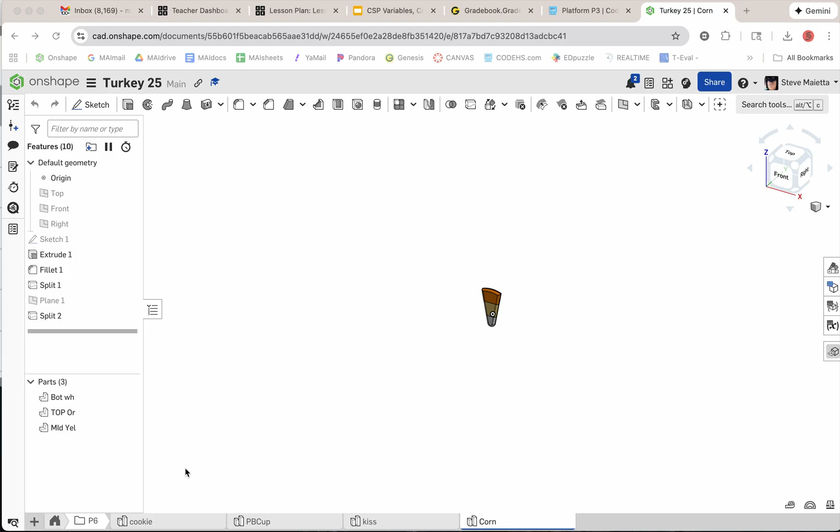I didn't make the pattern yet, but that's okay. I'm going to start my assembly first, and I can do that part later. I'll just show you the basics of how to assemble, and I'll put the two parts together for you here.

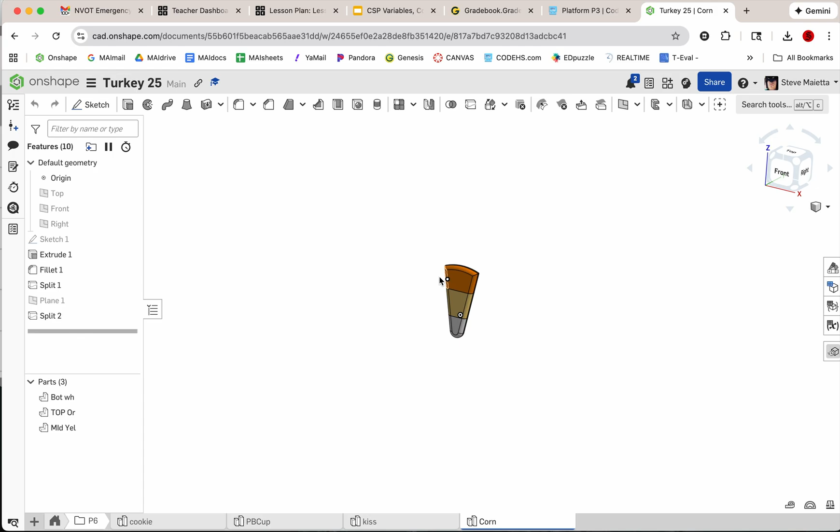First, look for a tab that says assembly. I don't have one because I made a bunch of folders, so all I do is click plus, create an assembly tab. There it is, it's empty.

This is where I like to say, this is where we build our Legos. These parts are our Legos, right? So we made our Legos already. First thing we're going to do is press insert, and we're going to bring our parts in.

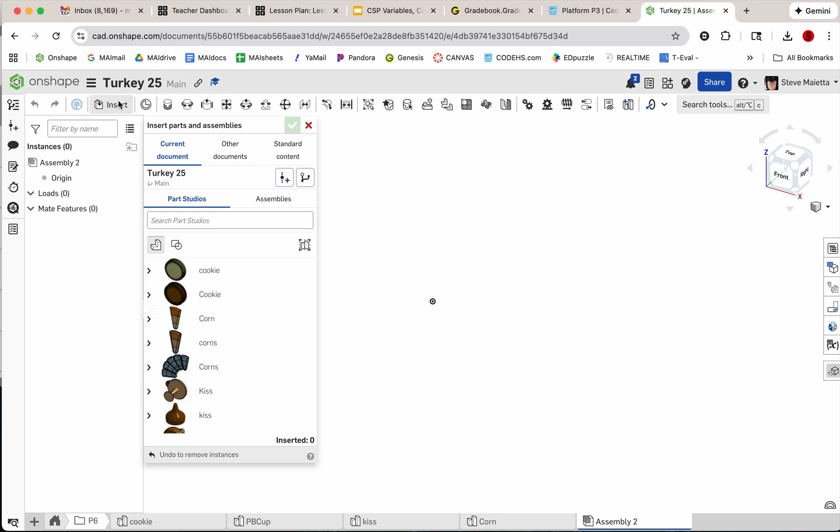Let's bring the cookie in, click it and stick it. The cookie is the center of our project, so I like to put that near the origin point, drop it in place. Let's bring the Chocolate Kiss in, drop it over here, and we'll find the peanut butter cup and drop that over there. These are the ones I'm going to assemble for you guys today.

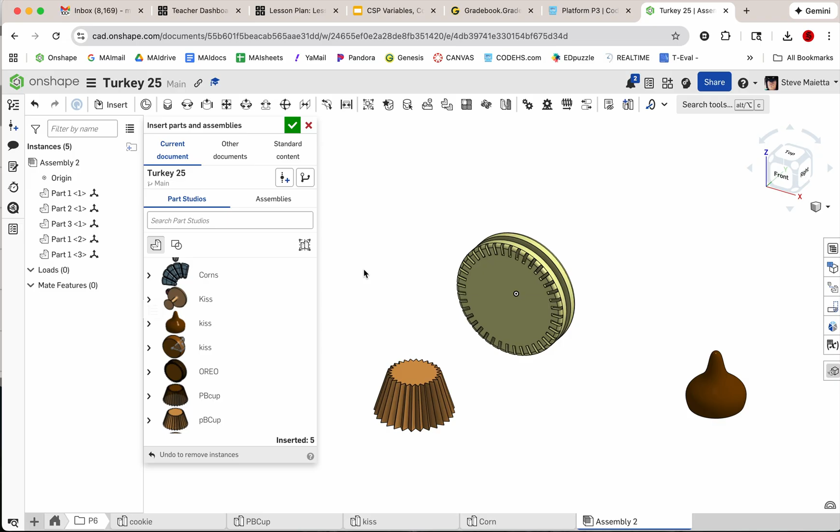Notice we have our parts all in one space. Over here we have 1, 2, 3 parts for our cookie, and we have these other 2 parts in our tree over here. First thing I want to do is make sure our cookie is all built in the right spot.

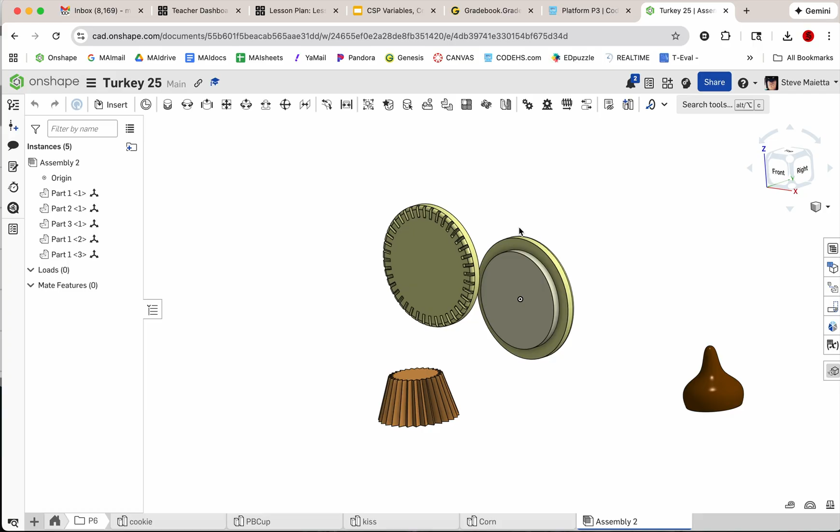I don't want to be able to pull it apart like that, so I'm going to group it together so it acts as one. I'll just drag a box around it carefully, and up here is the group command. Now I have a group, and I'll just name it cookie. There's my cookie, now it's all locked as one.

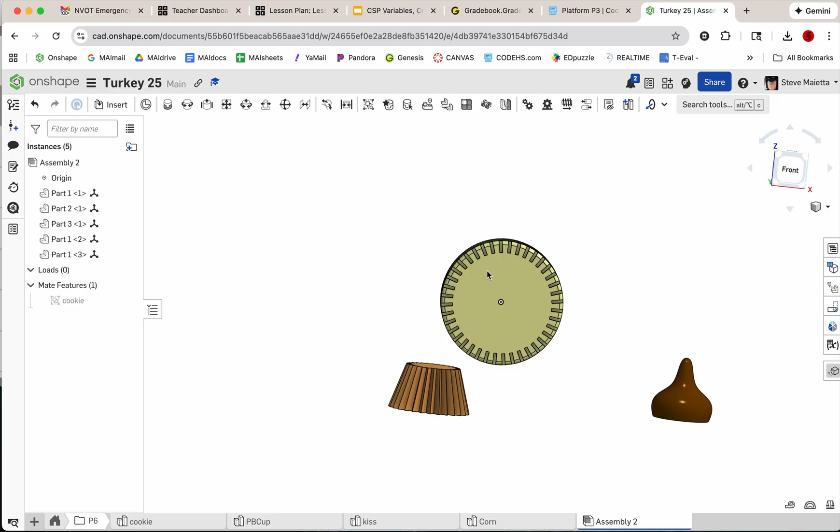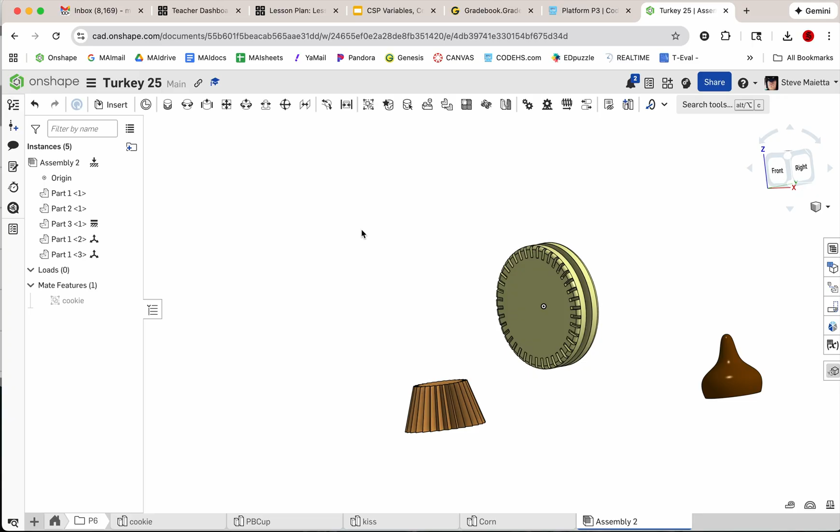I'm going to put it back in the center. Since the cookie is the foundation for our project, let's fasten it in place. I'll two-finger click on our cookie and use this thing called fix. That locks it in place—you see we have a fix now, and I can't move that. That becomes our foundation. It's a good concept, especially when you get into more complicated projects with moving parts.

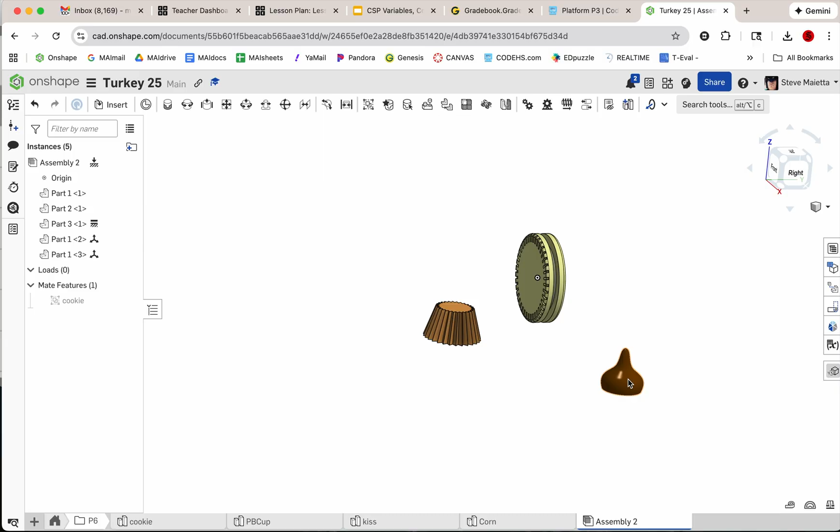Next, let's put this Hershey Kiss up here, because that's where the nose of the turkey is. Notice the kiss is in the wrong orientation, so if you click on the part once, you will see a set of handles appear.

These handles have curved outer handles that allow you to rotate a part. The straight arrows let you move it in a certain direction, and the curved ones let you rotate in the required direction. These rotate on the 3 XYZ axes—this one happens to be rotating along the X axis.

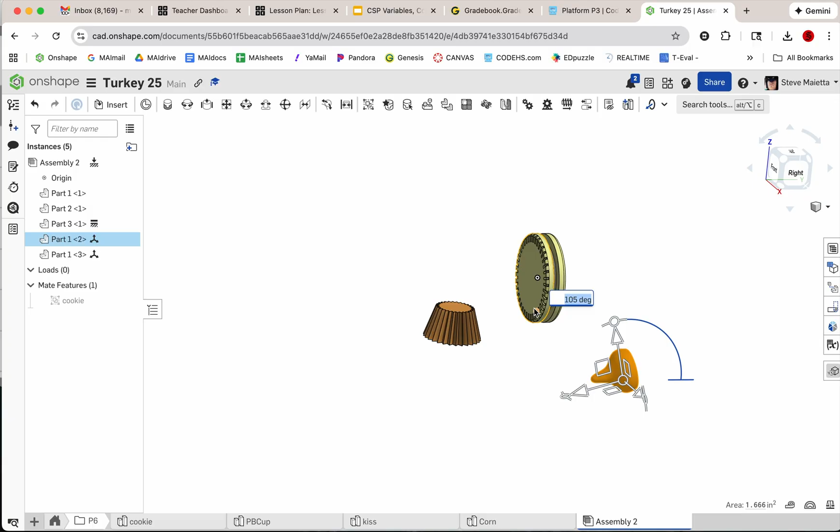Here's an important tip: always land your rotation on 90. Type it in, 90 or 180—it's less common to need some random angle. Once you get it at a random angle, it doesn't mate as cleanly, and it's hard to get it back. So my tip is always do it in increments of 90, unless you know it needs to be something else. I'll just press enter—now the kiss is in the right orientation.

I'm going to get it somewhat close to where it needs to be, and now I'm going to fasten them together.

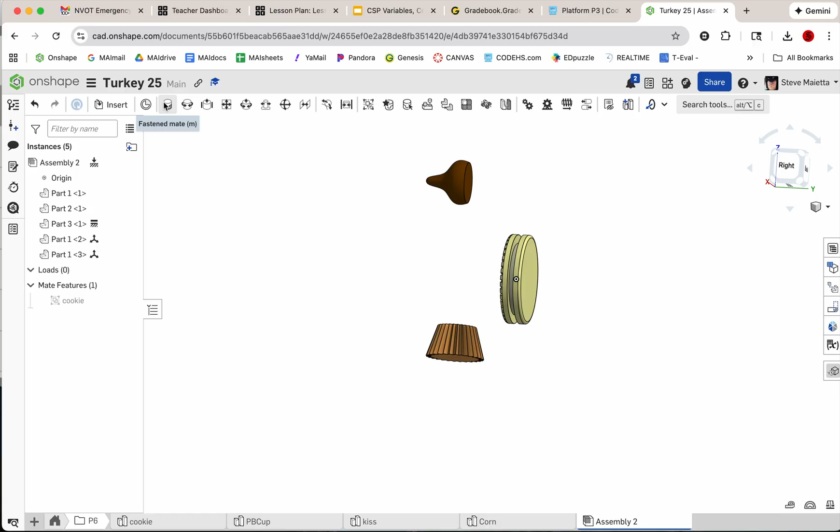Okay, so what we do is we're going to fasten them, which is right up here. When you click Fasten Mate, it's asking you for these things known as mate connectors. As I start to hover around here, you will see these little orange or yellow circles appear. Those are known as mate connectors. So I need to put the two mate connectors, one from each part.

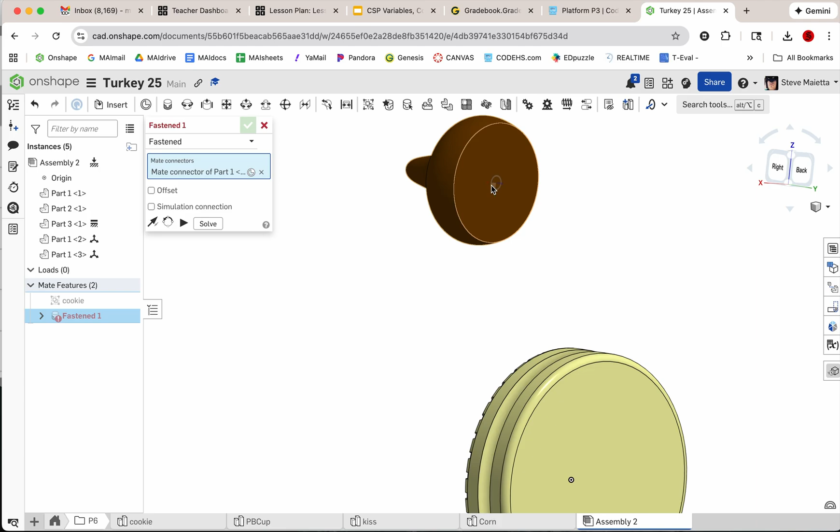So this one in the center, I'm going to orbit around, and I'm going to find one in the center of this part as well. And notice it's going to bring the kiss. It makes those mate connectors exactly match.

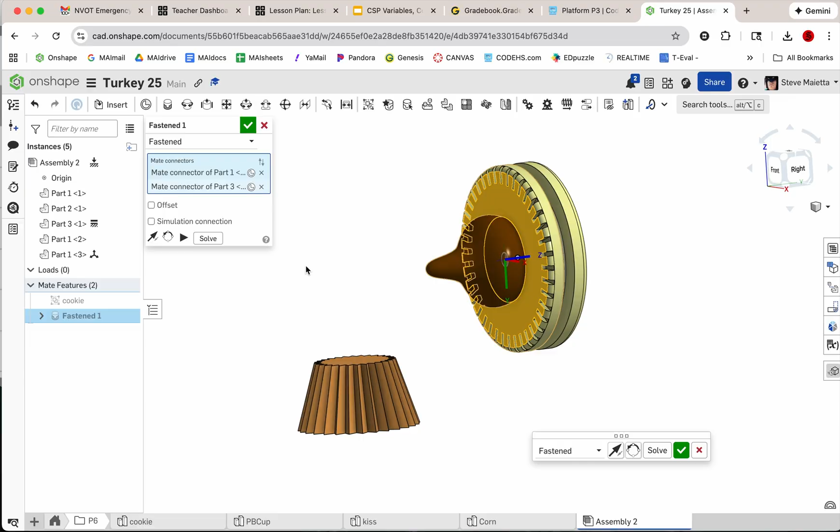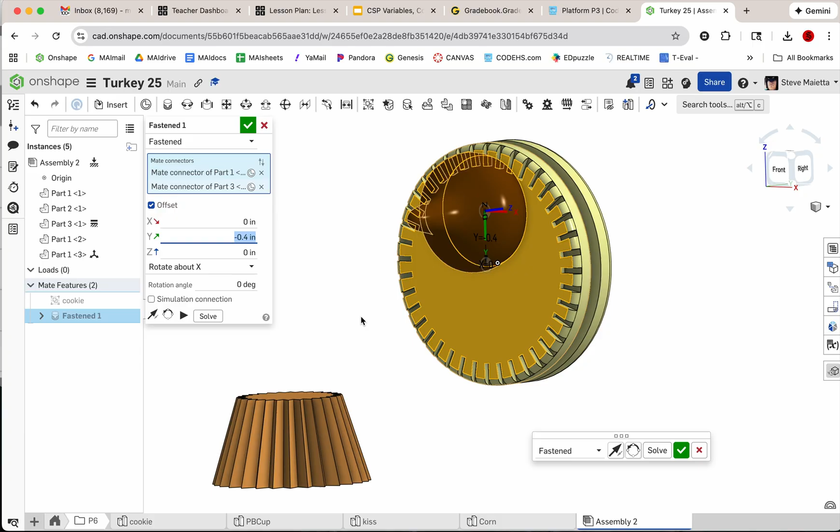Okay, and that's cool. Now we need to move the Hershey Kiss upwards, right? Because it's supposed to live up here. This is the face of the turkey. So if you look up here, we would want to move it along the Y axis here, green. Okay, so I'm going to click offset, and I'm going to find the green one here, and I'm just going to use the arrow keys on my keyboard, up or down arrow, to add some distance between those.

Okay, and there's no true dimension on the blueprint for this, so do it by what you think looks right. And to me, that looks good. I happen to move it negative 0.4, and then I can accept that. Now I've fastened that, and you notice you can't move it, I can't drag it.

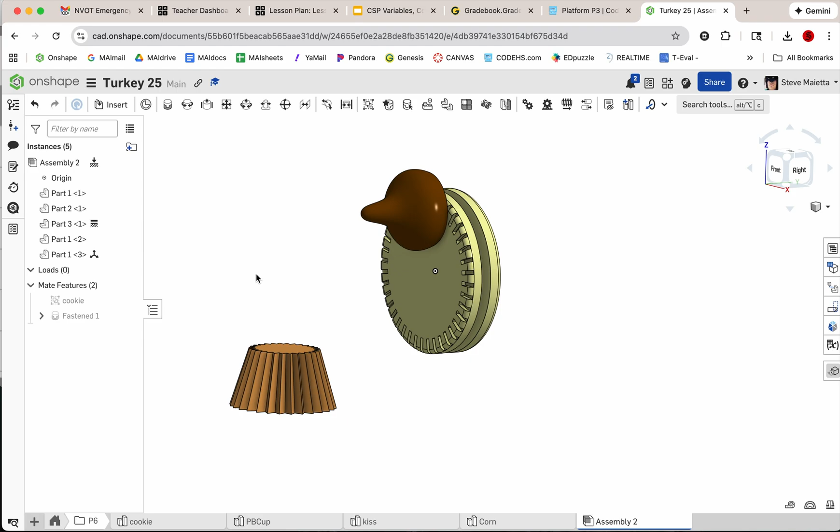We're going to do the same for this one. So step 1, we're going to rotate it, and step 2, we're going to fasten it. Okay, so peanut butter cup. I'm going to click it to bring my handles. I'm going to think about which handle I need to get it in the right rotation. So this is the one that's going to get me. I'm going to go 90, enter.

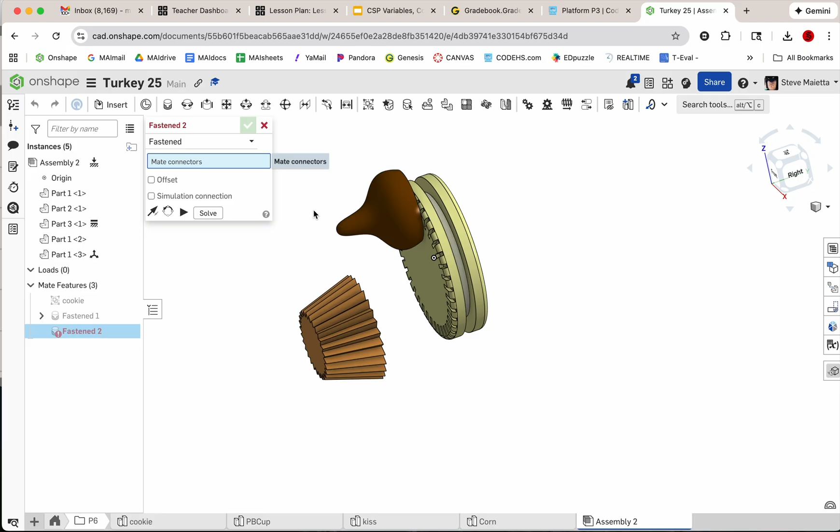Okay, I'm going to click fasten, and I'm going to click the mate connectors. So I'm going to click this one, and I'm going to orbit around to this one. Now they are matching. I need to offset this one down a bit.

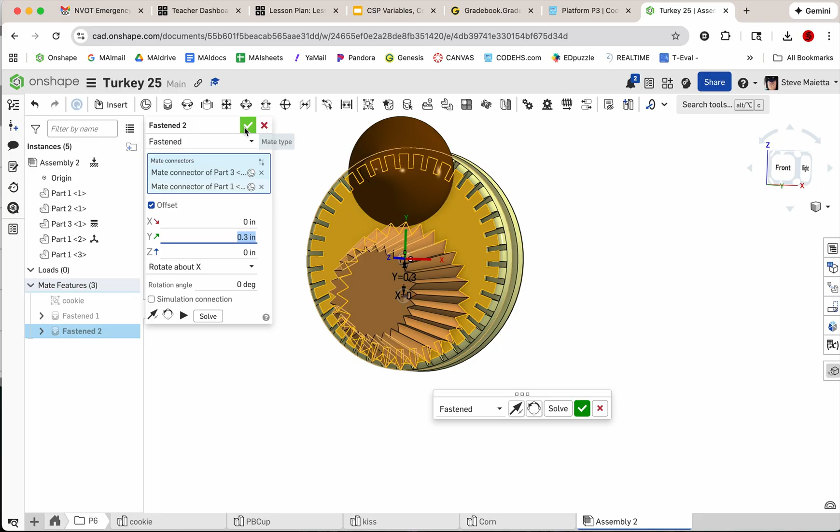Same thing on the green axis. So I'm going to offset, green, and I'm going to move it down a bit. Something like that. I'm going to accept that fasten. Perfect, all right, that looks good.

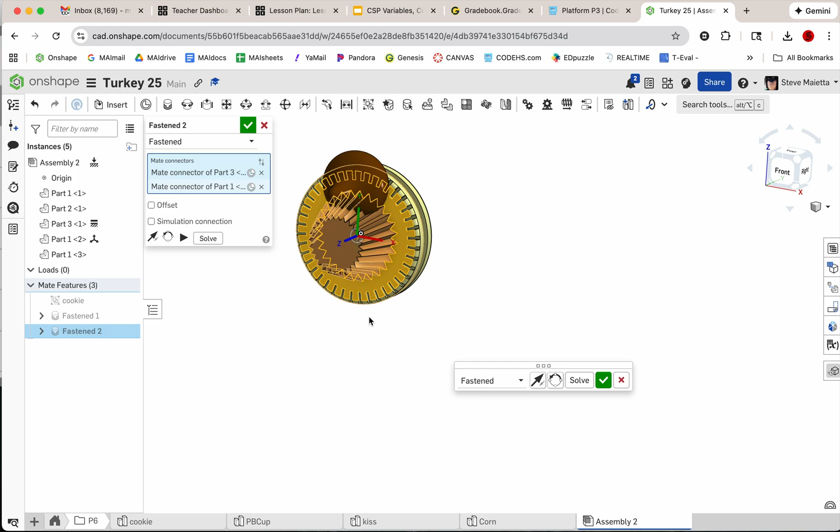I'm going to undo that real quick. I'm going to show you something else that maybe you've been wondering. When I click fasten, and I find my mate connectors, notice, maybe you did, there's another little box that appears, this little slim one. What this one does, it allows you to just accept and build another.

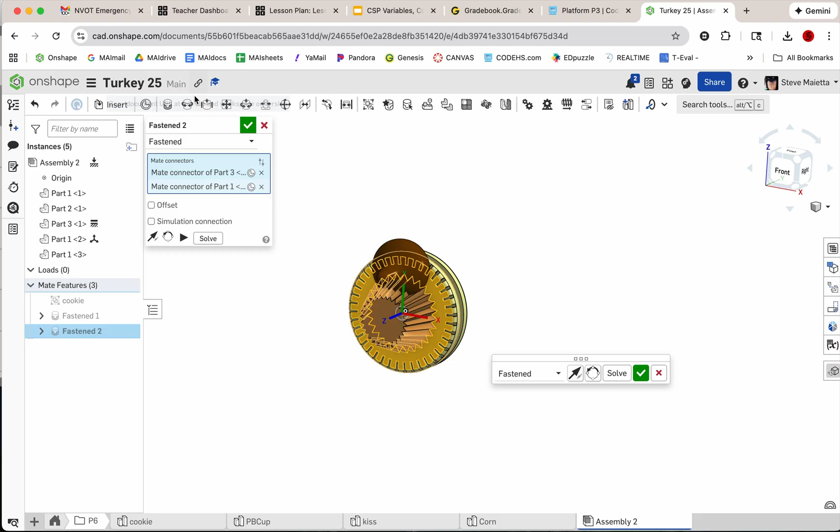Accept and build another. So if you need to build like 20 of these in sequence, and you're all ready to do that, you can just click this one, and then it'll immediately allow you to build another mate, another fasten. Okay, so that's what that's for. But we're just going to accept this and do one at a time.

Oh, now look, I accepted it without offsetting, so I'm going to double click in here, and I'm going to offset, and move this thing where it needs to be. Accept it. All right, the final thing is, if you need a mate connector that doesn't exist, you can build one here. You can insert one, but for this project you don't need to do that, and that can get sloppy.

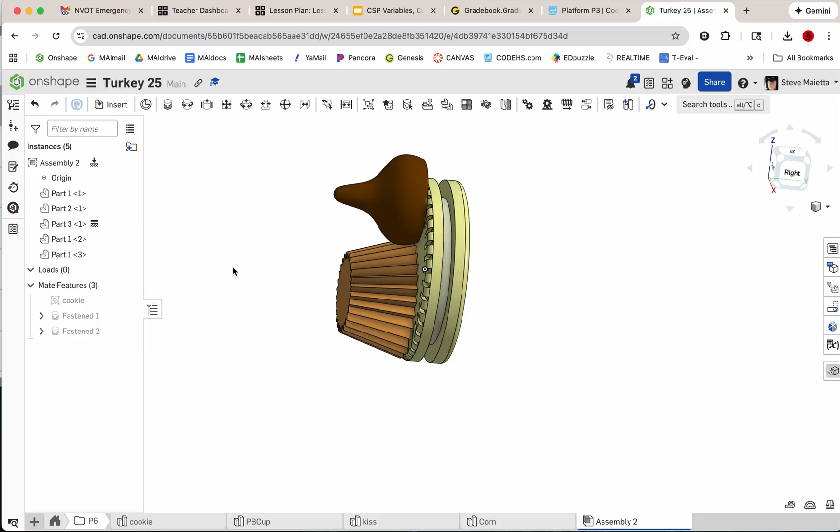All right, so next step, if you've done this, is to make your pattern of your corns. If you haven't, you're going to insert the corn sketch in here, Part Studio, and you're going to group the corns, and then you're going to mate them back here somewhere and move them into place.